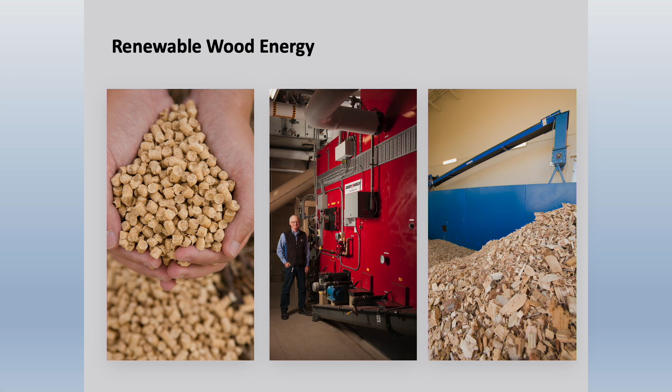So just sharing this final slide from me, our Wood Innovations program is here to support development of projects. We offer technical assistance. That's through our National Wood Energy Technical Assistance Team, which Wilson Engineering Services provides that service for us. They're a great firm to work for. We work with a number of other excellent firms in this space as well. They're available to just have a chat about, initially, what is wood energy exactly and why might it work for me. They can help with a feasibility study, fuel supply analysis, advise on some funding and incentives. Mike and Northstar talked with our tech team early on that helped support them in moving forward.

And then we also offer grants to help support wood use in manufacturing. This specifically includes supporting wood biomass energy projects as well. We have grants of up to $1 million specifically under our Community Wood Energy program. And the lower rate is $300,000 grants, but you can ask for as little as $50,000. So those are some of the services that we offer. The grant requests for proposals for this program are usually advertised in October. We expect our next RFP to be announced next week, and we expect this program to be funded into the future. The Bipartisan Infrastructure Law and the Inflation Reduction Act have been really generous to these programs and made these investments in healthy forests and the bioeconomy. So I would say get it while it's hot, because that funding is pretty abundant right now, and we're willing to help.

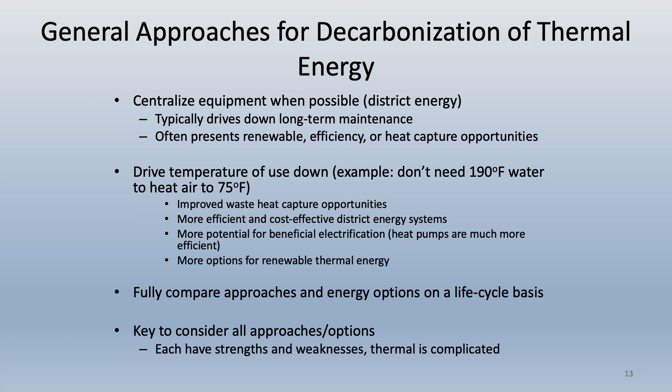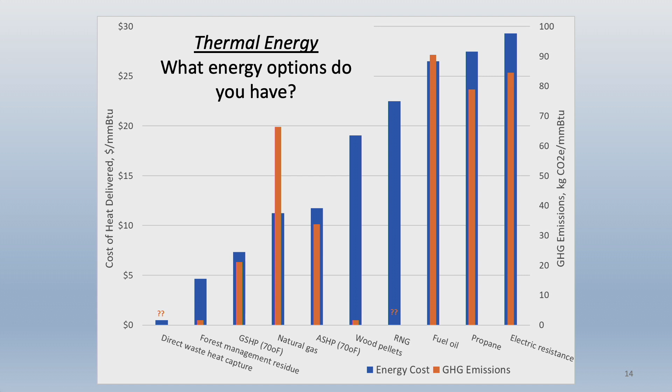So wood energy really fits in well here, because if you look at wood energy, and we'll go into this a little bit in the next couple slides, wood energy is very low impact as far as the overall carbon life cycle when you compare it to what happens to those products in another life if they're not used for wood energy and offsetting some fossil fuel energy.

What happens if it turns into a forest fire instead of getting those products out of the woods? The emissions are way higher than if you use it to offset fossil fuel. So there's always been this negative view in the environmental movement about burning wood, but what are the alternatives? If you look at the life cycle of wood energy, that carbon is stored from the sun, and if you use it and maintain the same mass in the forest, it's generally considered to be renewable.

And if you don't harvest it and you don't manage it, what happens to it? It ends up in a landfill from residual products. It ends up in a forest fire. It ends up in burning piles in the winter, and those emissions are way higher than if you manage it for a renewable resource.

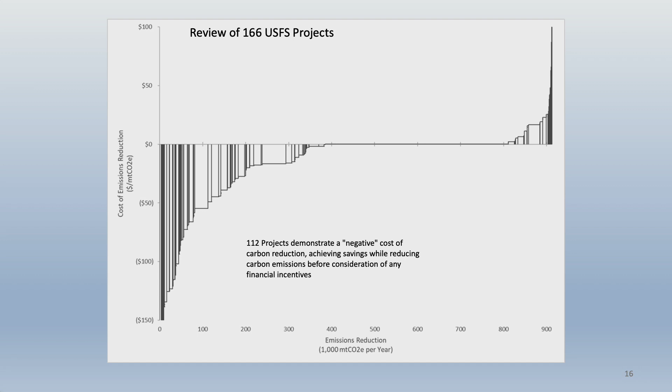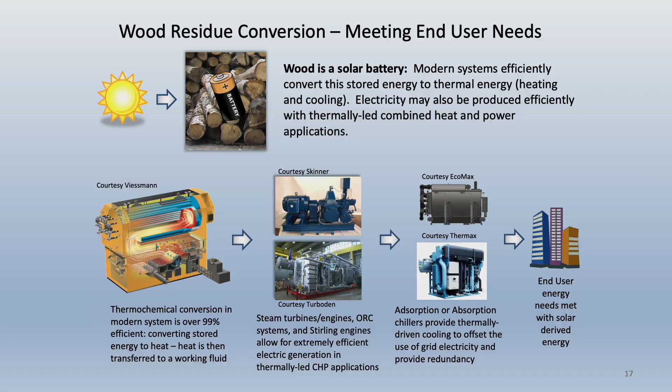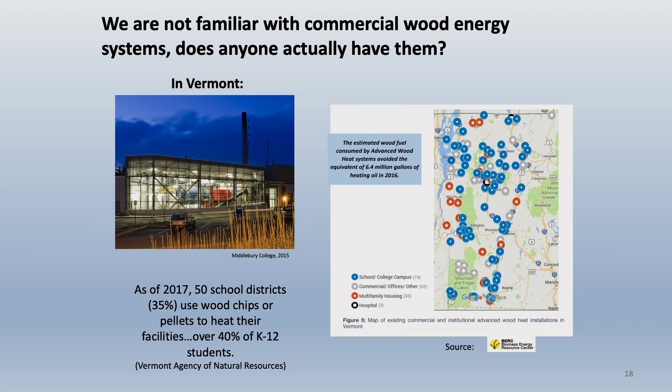So a lot of people may or may not be familiar with modern wood systems, but in Vermont, it's been a real push, and that push is driven by economics, and the economics are that oil is the main fuel for heating in Vermont. And because oil is a very high cost versus natural gas or other energy sources, a lot of projects have happened there, and Vermont is a very forested state.

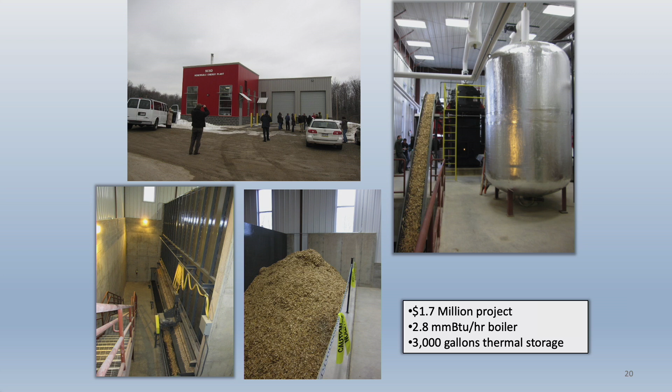The project was about a $1.7 million project. It consisted of the new building in the upper left-hand slide, I guess it's upper left. It has an automatic wood handling system that's shown in the 2 lower left slides. And it also has thermal storage so that the wood energy system can modulate and not have to have peaks and valleys. I guess it's a $1.7 million project. Inflation.

In New Hampshire, to heat the agricultural section of the University of New Hampshire, they put in a new wood energy district heating system. This system was fairly low cost, and the reason it was lower cost is there is a company in New Hampshire, the Vermont-New Hampshire border, that produces a dried uniform chip product that can be sold, and it's sold at a premium to wood chips, but yet it's very economical compared to making pellets, low energy.

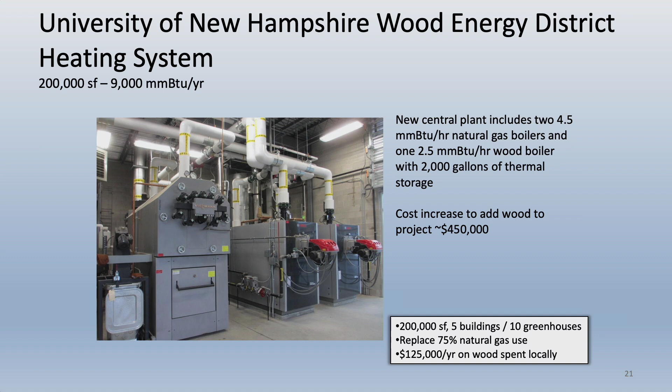Holderness School in Plymouth, New Hampshire. This is a campus. I guess it would be called a preparatory school. They had a goal of 0 carbon emissions by 2021 or 2020, and this project helped them achieve that goal. We brought in from Europe 10-gauge steel piping that could be fitted and bent. You can see that in the upper right-hand corner. Reduced the number of fittings that were required.

On campus, we connected 25 buildings, and there's 16,000 feet of underground piping. It has a 5 million BTU, similar size to what I think you're installing out in California. Wood boiler, same company. Messersmith produced this boiler, wood boiler.

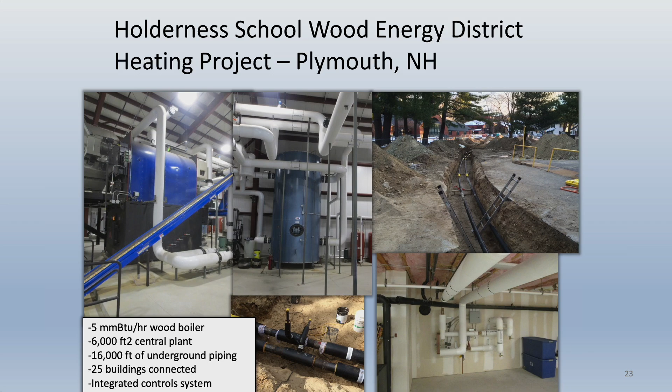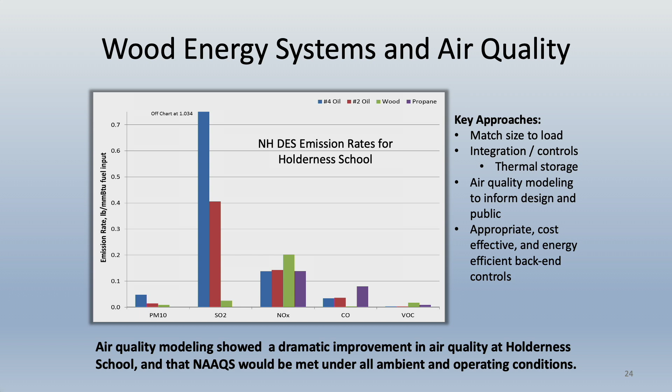So why would you want wood energy versus prescribed burns or other ways to handle that wood? And you can see the real issue here is emissions. They're so much lower when you can burn them in a controlled fashion. This is Peterborough Library. Again, it's a dried chip system, and they also do heating and cooling, absorption cooling. And this project's about 8 years old, I think.

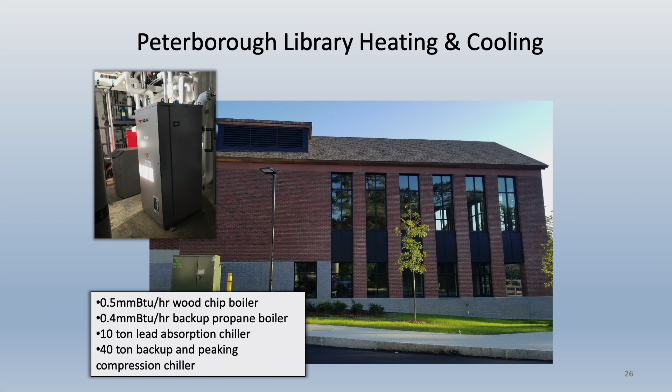St. Benedict's, you can have any size and scale. What's interesting about this project is it's a monastery in Massachusetts that has their own school, and they are, I call them scroungers. They can come up with almost anything you'd want. They asked us how much wood they needed a year, and it was a very small amount because it was not that big a system or big a campus.

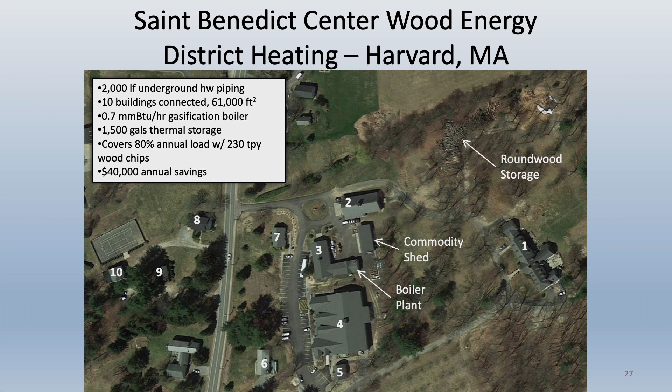And I think we told them it was about 230 tons a year or something like that. And so here's what they came up with. They got donated this 40 ton per hour automatic hog system. So in about 5 hours a year, they can produce the wood they need for their campus. They also got the local utility to bring them in. If you see the log pile on the upper left, there's enough wood in that pile for about 10 years. And they got all that done before they instituted their project.

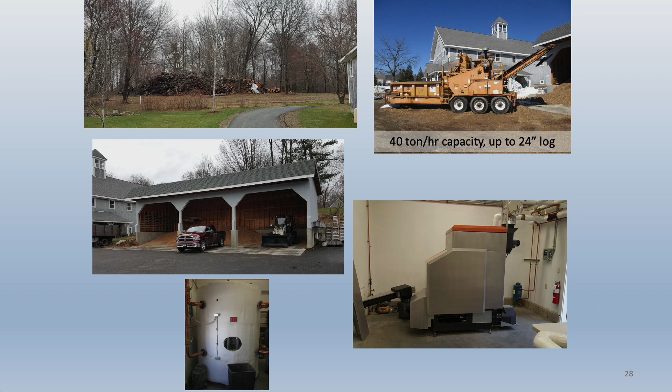Even systems as small as a cordwood system. This is a district heating system. Harvard owns a place called Harvard Forest where they do research on carbon capture and the CO2 in the air and the effects on the forest. They have, I think, about a 200-acre forest there. And so from down trees and trees they want to manage within that forest, they produce all the heat for their campus at Harvard Forest.

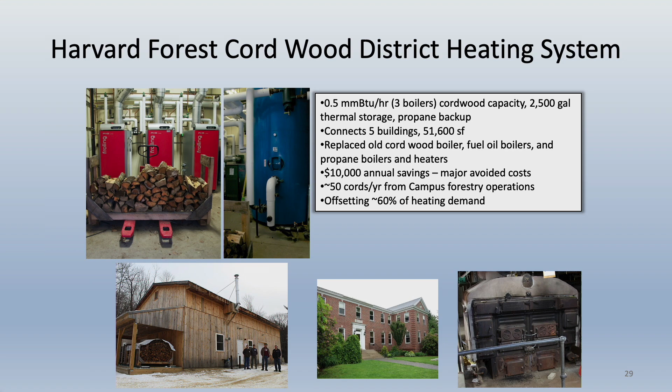So wood residues can be a useful resource for decarbonizing thermal energy. Thermal energy is one of the harder ones, and it's a lot easier to have solar panels or wind energy for electric. But when you get down to thermal energy, especially at higher temperatures and pressures, wood's a very effective way to decarbonize. Modern wood energy systems are clean, they're reliable, they're automatic, and wood energy systems come in all sizes and shapes.

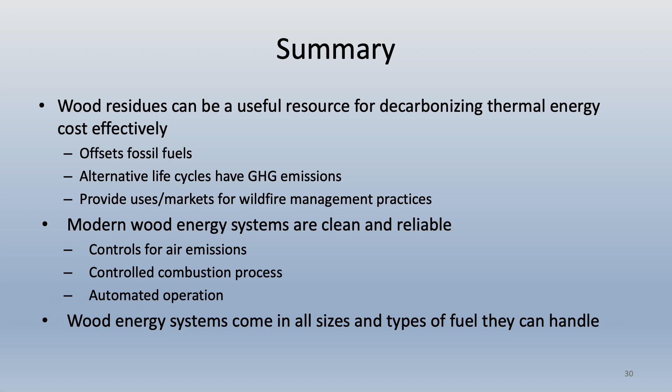So again, contact Julie if you want technical assistance. They kind of direct us where we go. And so the first contact should be through her if you're looking at a project or you think you have a project you'd like us to take a look at, and she'll get in touch with us. Thanks.

Can I ask you a quick question? What was the cost of the whole of this project? Do you recall? Oh, was it on the slide? Can you go back? Is that possible? I think it was about $4 million, maybe. That's been 13 years ago, and I don't remember, but I can get you that answer. In fact, I can get it before the session's over. I can find the answer, yeah.

So I guess to that question, I don't know if that stems from just trying to get a sense of what do these systems cost? They can be less. So it depends. Like in the Holderness system, most of the cost there was hooking up the 25 buildings on campus, at least 60% of the cost of the project.

Typically, a 5 million BTU an hour boiler, the building and the automatic handling system and everything that supports it, emissions control, you're probably talking about 650 to 750,000 for the hardware, and then whatever you want in the building. But that gives you an idea of scale. And then the cordwood boilers that were shown at Harvard Forest were about $30,000 each, I think, in that range.

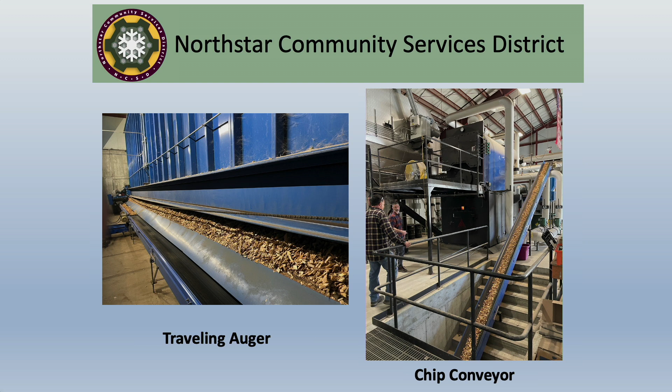In any event, no problems on a hospital site, right? Chip bunker, just a big garage full of wood chips, very automated system with these augers. You can actually run these systems from your phone. Half an hour a day maybe of maintenance if you design it right. So the skill set that we have with our water plants and sewer lift stations and pumps and buried pipes is basically the same skill set it takes to run this plant. So we didn't need to hire some specialized folks to take it up. We got that right in our staff, which was a key thing of our scoping study.

The ESP, or the electrostatic precipitator, is kind of your next level of defense against particulates after a multi-cyclone, if you were to go this route. We're actually utilizing what's called ceramic filtration with our project, which would negate the use of a multi-cyclone or an ESP, and it takes up to 99% of the particulate out, but also close to 90% of the NOx, which is really hard to achieve with any of these other systems. And in our particular air pollution control district, the NOx levels are very low, so they're happy to see us go through it. It's the first time ceramic filtration is going to be used with wood energy in the US. I think they did it in Japan, but pretty excited about that.

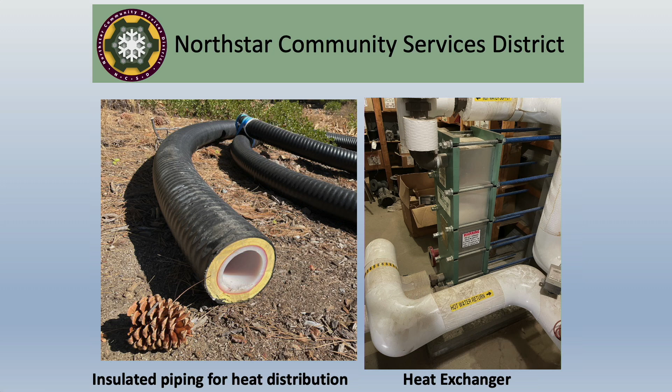We're going to take down about 4,000 bone dry tons a year. Put that into perspective, the 25-mile radius of our location here probably produces in the neighborhood of 50 to 100,000 bone dry tons a year that needs a home to go to. So not going to take it all down, but it's a start. And there are other organizations in our neck of the woods that are looking at projects. So we will take more material than we produce within our district as part of that effort to create that sustainable offloading and disposal.

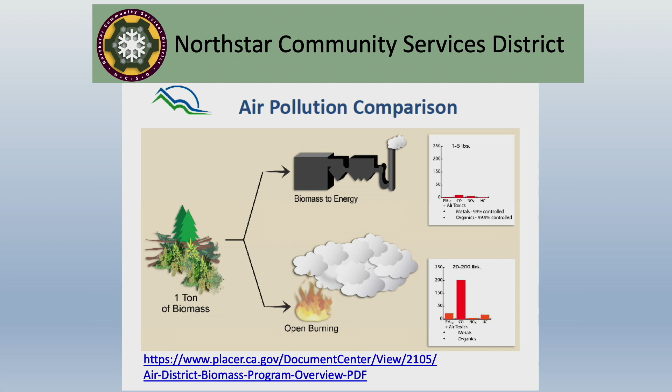Some studies, I won't go into these in detail. Tom kind of reviewed these in terms of the life cycle, the particulate difference versus open pile burning, whatnot. In our case, our competitor is natural gas. If you're dealing with fuel oil or propane, the ROI is better. This is a hyper volatile commodity. If some maniac starts a war on the other side of the planet, the thing spikes. And so one of the nice things about hooking to a system like this is we can create a very stable, long-term, less volatile line item in your budgets for heating energy because it's a locally produced byproduct.

So wood is good. That's the takeaway. It's not something that we need to be ashamed of. Like Tom said, it's part of the carbon life cycle. It is renewable. There is no silver bullet today in terms of turning this material into a pure carbon negative energy producing process. There are rocket scientists, believe it or not, working on that. A company called Arbor, former SpaceX rocket scientists, are trying to re-engineer the gasification. But right now, incineration in a controlled environment, putting that tried and true thermal energy to work in plants like ours, and it could be retrofitted into any kind of building where you have a good need for heat, is a very reliable way to go.